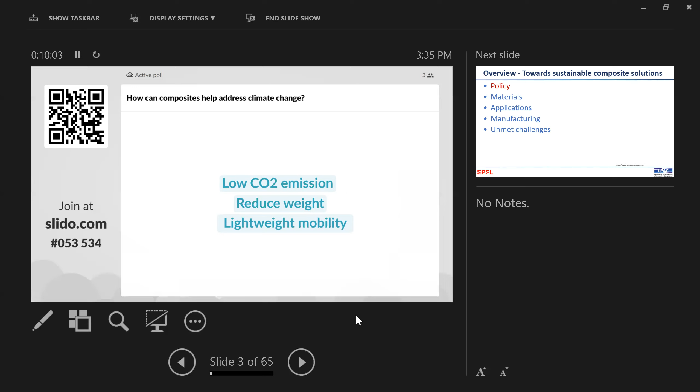So lightweight mobility. Reducing CO2 emissions. Any last ideas? Oh, here they come. Longer lifetimes, yes. Yeah, I'm going to take another photograph of this one. Great, we're going to see a few more in this lecture as we go through.

First thing I want to talk about is policy. When you leave here, there are some policies that you need to know about. One is the Green Deal. Anyone heard of the Green Deal in the EU? Two people nodding. Okay, the European Commission has set some proposals to try and reduce greenhouse gas emissions. And it set these targets. Some relate to renewable energy and some relate to transportation. So these targets are things that industry needs to work on to meet these Green Deal objectives.

So in the European Union, they can't sell these disposable stirrers for coffee anymore. Okay, things are changing and it affects companies and what they're working on. And to prepare this lecture, I spoke to 5 polymer companies, interviewed them. Solvay, Dow, Radici, a couple more, to see what they said.

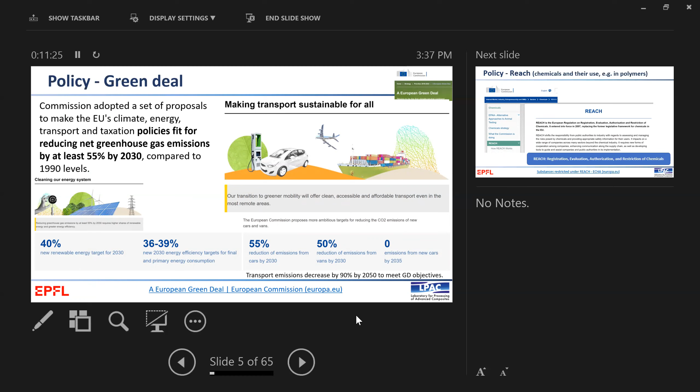One thing that you need to know about is REACH, which is the registration, evaluation, authorization, and restriction of chemicals. This is European legislation. So some composite ingredients that we used to use are now banned under REACH because the chemicals were hazardous. Okay, so it's a legal framework, and you need to know about this thing called REACH that affects substances that are often used in composite processing. So just store that word in your head. I haven't got time to go in depth into it. But you get people in companies who spend their entire career looking at REACH compliance of a company's products. Okay.

Another one is the end-of-life vehicle directive in the European Union, which basically says we need to reuse or recycle 85% of the car. So there is legislation at a European level that affects the end-of-life vehicle that we have to meet.

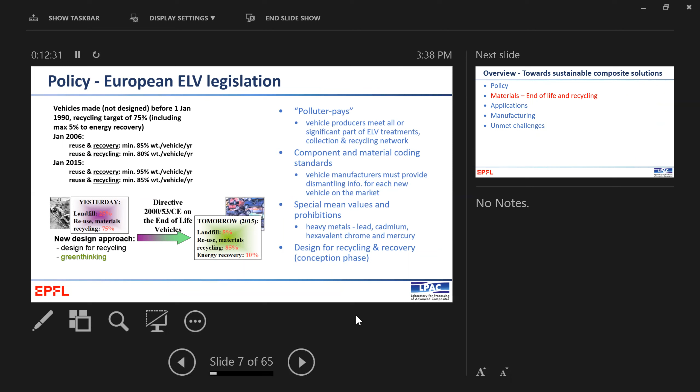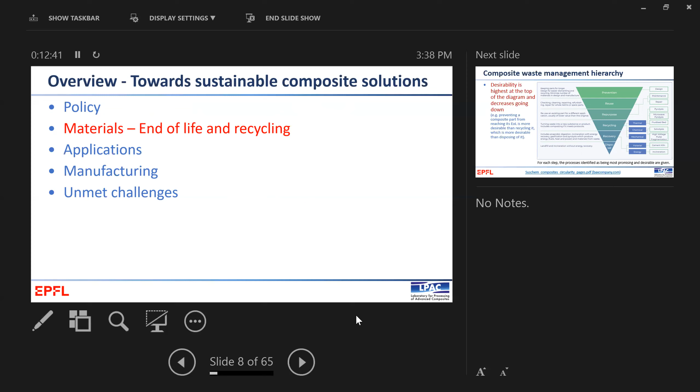Okay, so we're going to look at, first of all, materials from an end-of-life and recycling perspective, and then we'll look at bio-based materials. So from end-of-life and recycling, this is an upside-down pyramid where we want to try and prevent, reuse, repurpose, recycle, recover. Okay, so we want to keep parts for longer, design for dismantling. So that's the design part of the process. We want to reuse components, that can be maintenance and repair. We want to repurpose to keep parts going, often in a different application, kind of hard with composites.

Then you come to recycling, which is where most people think about composites in terms of life cycle analysis and the different approaches, thermal, chemical, mechanical. You can do a range of processes here to recover materials, but the desirability is highest at the top. So not just recycling, but preventing.

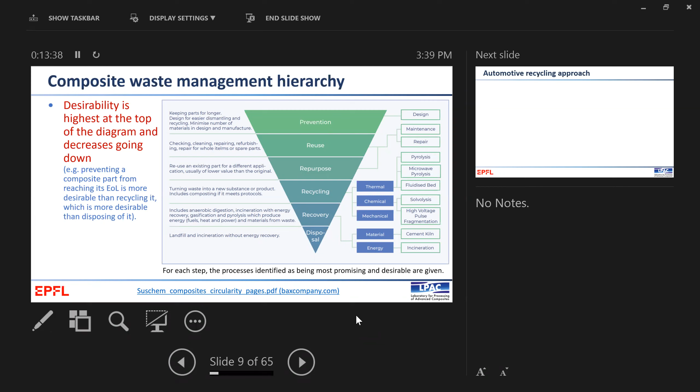The automotive recycling approach today is you take your old Peugeot and you take out the fuel and you drain the oil from the shock absorbers. You remove the catalytic converter. You dismantle some nice to have parts like bumpers, big plastic components. And then you take it to the shredder and you crush it and you turn it into small particles of material. So that gets rid of about 80% of the vehicle.

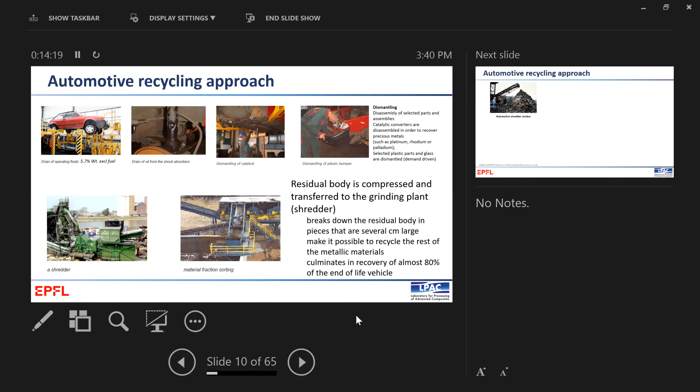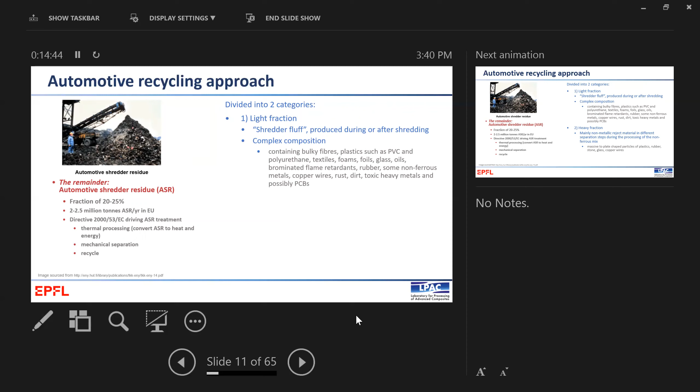So unless you've dismantled your composite part, it's going to end up like this. So in the future, we need to dismantle more components from the vehicle. What you get is called automotive shredder residue. And there's a lot of this. We haven't got time to go into this slide in lots of detail, but it's a big pile of 2.5 million tons. And there's two fractions, what they call shredder fluff, which is all this bulky plastic stuff, the seating, but it's also contaminated with hard to recycle materials. And then there's a heavier fraction.

Car companies often make statements that this will be future treated using new technologies to a greater extent, but they haven't yet got it figured out. Okay, so be aware of this and be critical.

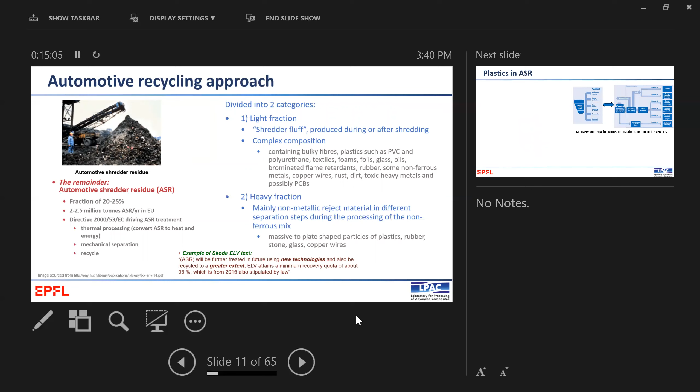Ways to recycle plastic from the end-of-life vehicle. Well, you can landfill, you can burn it to recover energy, you can use it to fire a cement kiln, you can use the feedstock in the blast furnace. Some different approaches. There are some better ones. These are the dominant polymers that are in this residue, but often it can be quite expensive to recover the materials.

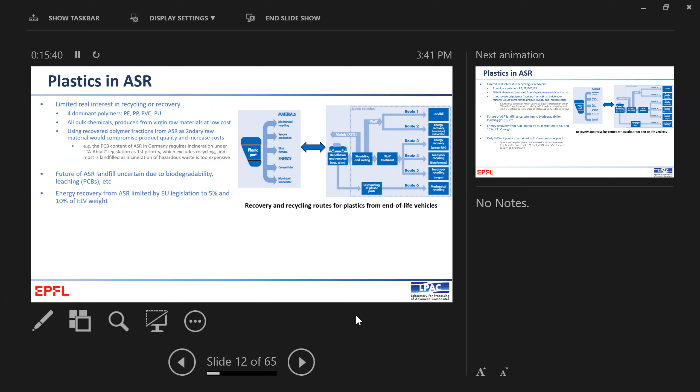Landfill is becoming illegal in the European Union, so that's going out. So only 3 to 4% of plastics in cars are currently really recycled. So there's demand for the materials. In aerospace, there is no equivalent legislation to the end-of-life vehicle. So currently you've got 2,000 aircraft parked in the desert in the US or in other places, and a lot more military aircraft. And over the next 20 years, there'll be about 5,000 airliners to be withdrawn from service.

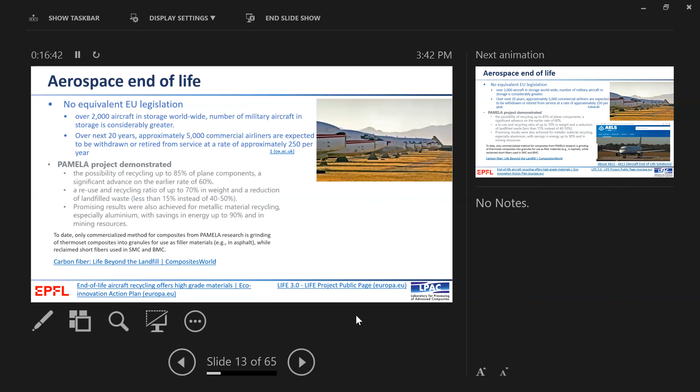Airbus had a project called PAMELA looking at recycling, but the only commercialized method from this research for composites is to grind them up for use as filler materials in roads or in sheet molding compound. So you take your old Airbus that's got a carbon fiber tail. Today, that's what happens to it. And it's not good enough. We need to go further than that with recovering materials because they are very valuable.

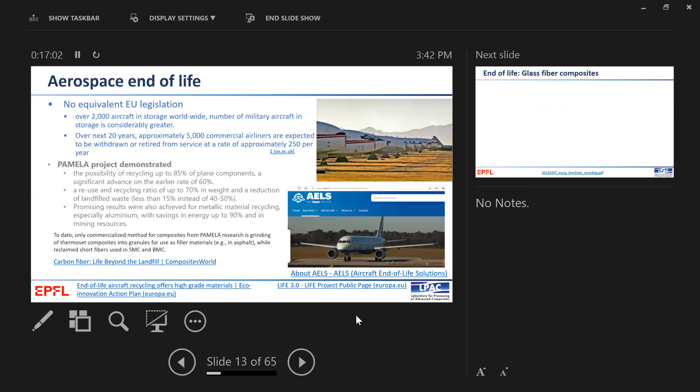There's one company in the Netherlands where they buy old aircraft, they take them to pieces, and there's actually a database online where you can rebuy parts of the aircraft, service your Airbus. So they're starting to go that way, but there's no legislation for aerospace end of life.

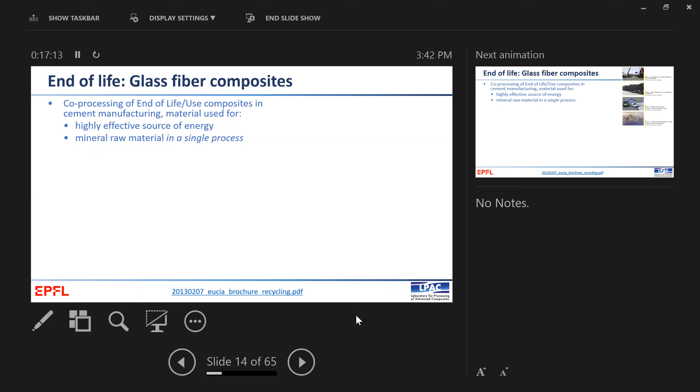I was very surprised. Glass fiber composites, well, if you look at wind energy, for example, what they do is they take the wind turbine, they chop it up into big chunks using mobile saws, like logging machinery, I suppose. Then they get this kind of regrind. And what they like to use it for is to replace hydrated or carbonated minerals in Portland cement and as a fuel for the cement furnace.

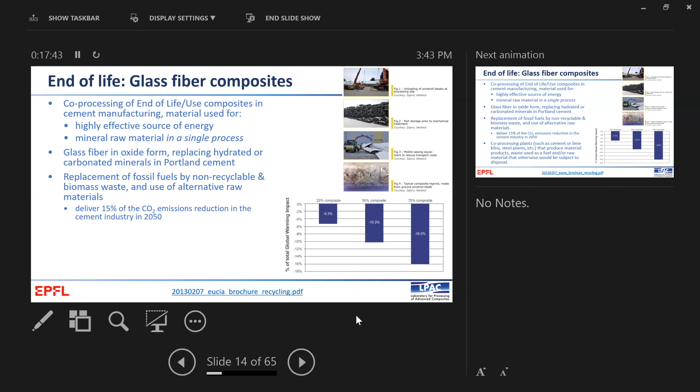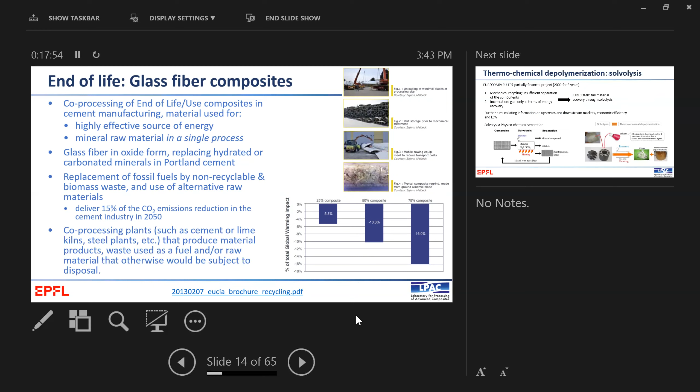And they say that that can deliver 15% of the CO2 emissions needed, depending on how much of it you put in the cement industry. So to power the furnace and to help become part of the cement itself. But again, that's not really going far enough. You're losing so much value.

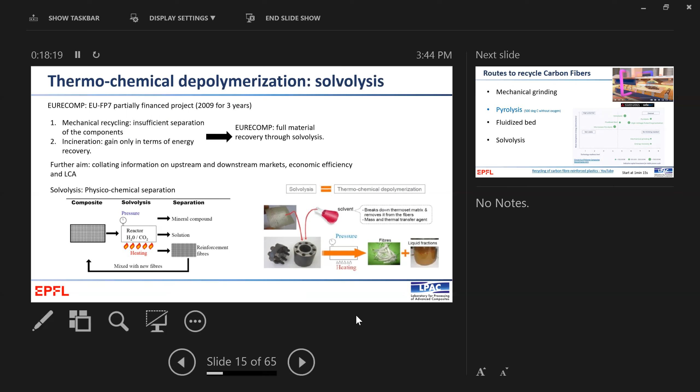We can also try and recycle by solvolysis, physical chemical separation. So you put your piece of composite with solvent, pressure and heat, and you get the fibers back. That is a way of recycling thermoset composites using solvolysis. So that's interesting. And there's a company here called Carbo NXT that were recently purchased. And they are here in terms of technology readiness level, TRL 8, and very attractive.

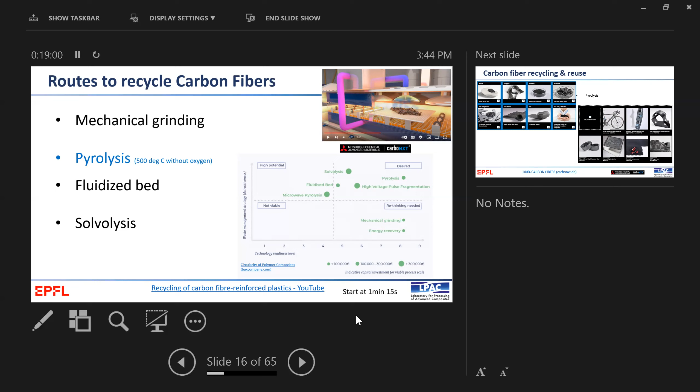So they now take old bicycle frames and bits of carbon mats and they put it on a conveyor belt and it goes into an oven without oxygen and they can get the carbon fiber back, okay? But it's all manual. You see in the video, people cutting out these things with scissors and hacksaws and putting it on a conveyor belt. So it's not as automated as those other factories that you saw at Airbus or BMW. So you run the risk actually that it costs more than the virgin material.

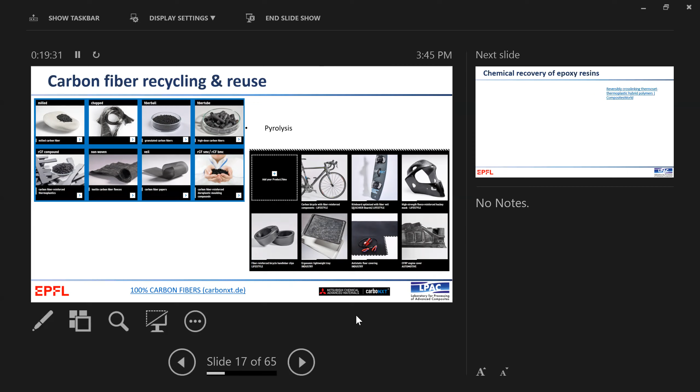But nevertheless, this company has converted waste into a variety of material feedstocks, either random fiber or chopped. They can't make aligned fiber. You can't get back from woven product to a UD material, very difficult. But their customers have made a whole range of products from recovered carbon fiber. So that is possible, okay? That is commercial.

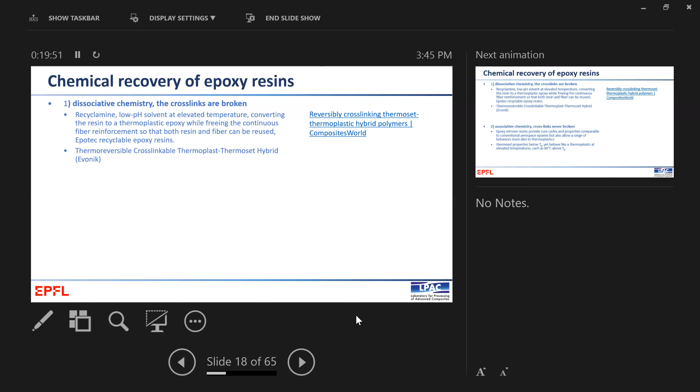Chemical recovery of epoxy resins. There are two methods coming out. First is using dissociative chemistry, where we convert the resin into a thermoplastic epoxy. Evonik have a system now that's commercially available. So they actually break the cross-links. The second is associative chemistry.

And this is a really tricky material because below the Tg, it's a thermoset, and above the Tg, it's a thermoplastic. It's a vitrimer, epoxy vitrimer resin. So you can do wacky things. So you can heat it up above the Tg and stamp form it, and then you can stick this and dissolve off the resin. So epoxy resins are really changing. People are reinventing them. Okay, I found that really quite fascinating. Using this thermoforming and solvolysis, you can get back to your carbon structure.

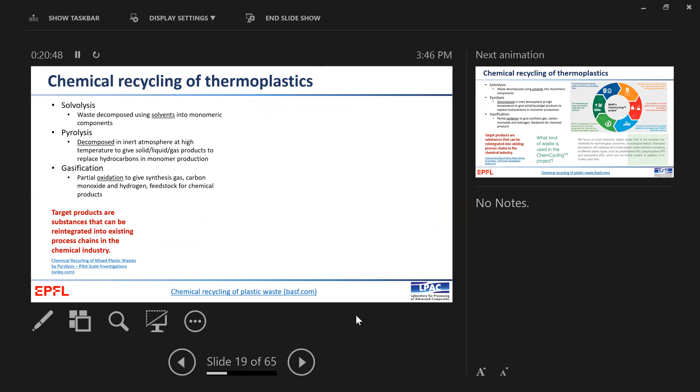Recycling thermoplastics is also possible using solvolysis, pyrolysis, or gasification. And this is like molecular recycling, as one of my industrial colleagues likes to call it, rather than chemical recycling. So you basically break down the polymer into the building block to polymerize a new polymer.

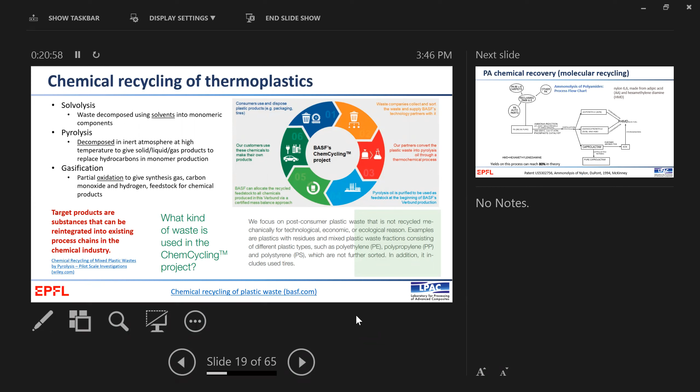You're recreating the feedstock. And an example for polyamide is you take your waste carpet, your automotive parts, and you use here an ammonia reaction with the phosphate catalyst, and you get back to your adiponitrile, which is the building block of hexamethylene diamine, which is what you make polyamide 6,6 from. So you're not mechanically recycling, you're actually breaking it down into the molecular building block needed to remake a polymer.

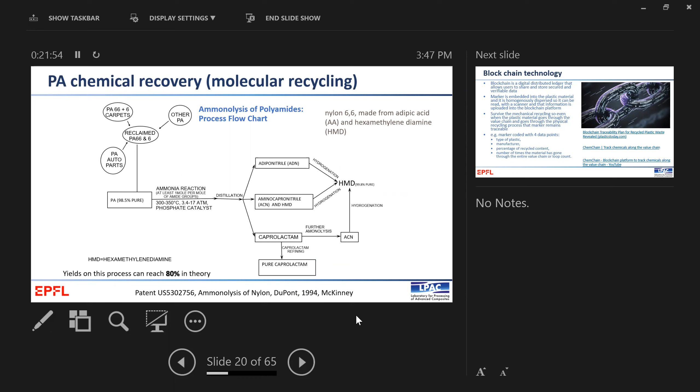And when I spoke to the person responsible for sustainability at Dow, he was saying this is the way to go. He was saying bio-based plastics, they don't like to talk about because of the conflict with water and agriculture and food. But here, there's a lot of waste plastic around that can be recovered and broken back down with really quite high yields. And if you run the chemical plant with renewable energy, the life cycle analysis is interesting.

Something else which I just put in at the last minute that you'll hear about is blockchain technology. And it's basically a way to put a marker in the plastic material so that you can know what it is all the way through the value chain. So when it comes to reusing or end of life, you can know what kind of plastic it is, which company polymerized it, how many times it's been recycled. So it can pass through the recycling step.

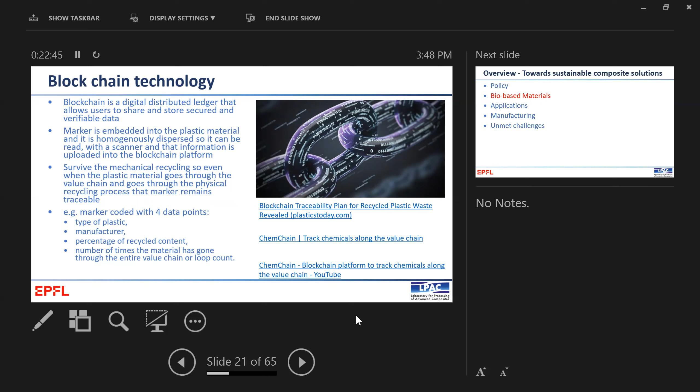So it's a way of using secure cloud data to be able to track your polymer through the stages of its life to help recycling. I hadn't heard of this word until 6 months ago. It's new to me, but a lot of people are talking about it. Dow and Solvay are both using this experimentally.

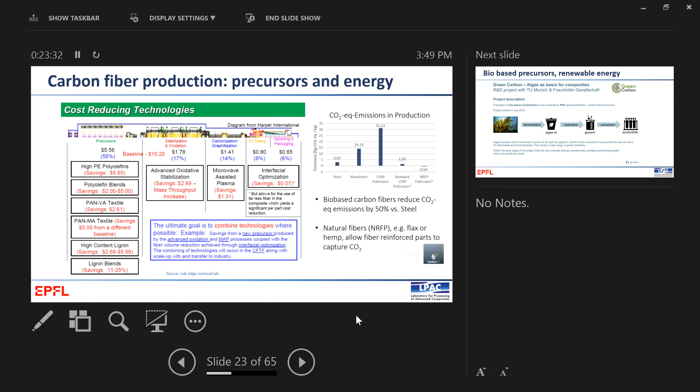And that's really interesting to me, because you could imagine that being scaled. It's not really competing with food. The problem is we need that in place. So if you want to make hydrogen storage tanks, you need to have enough kiloton capacity in the supply base to make your tank. And this is like 20 years behind where we need it in society. But nevertheless, that's the kind of thing that's going on.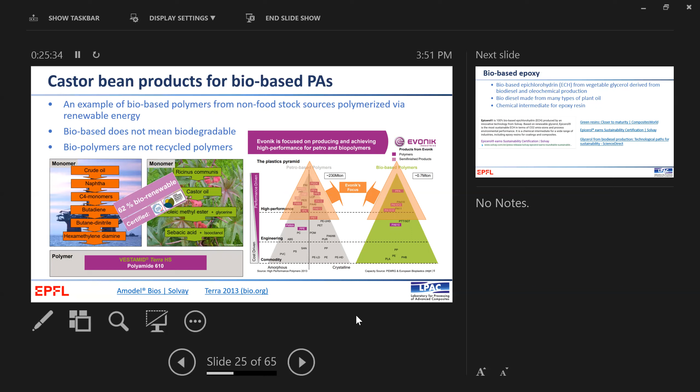Natural fibers, also very interesting. This is an EPFL spin-off, Bcomp. And they use European flax that they can weave, and then they can impregnate with thermoplastics. So you can see their value proposition. It's very good in safety, and they have some very interesting projects.

Here I've got a nasty footnote. I don't know if this applies to them or not, but someone did a life cycle analysis on flax. And if you use fertilizers to grow your flax, phosphorus and nitrogen cycle, the environmental impact is really hit. If it's grown without those fertilizers, it's really better. So you have to scratch the surface and see what's below the paint, okay?

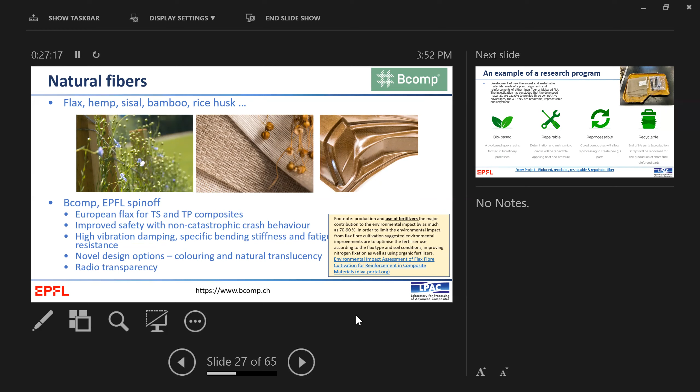If Bcomp are sourcing their flax that hasn't had high levels of fertilizer, it's really good. But if you're using lots of fertilizer, you're affecting that planetary boundary on the nitrogen and the phosphorus flows, okay? So you always have to think a little bit deeper to the global picture, not just, oh, it's a plant, because the plant didn't just grow in the field without some fertilizer, but maybe it did, I don't know. Question I need to ask them.

Okay, 12 years research in Veronique's lab has led to the startup, and it reduces maintenance costs and extends the lifetime of composites. A very circular approach.

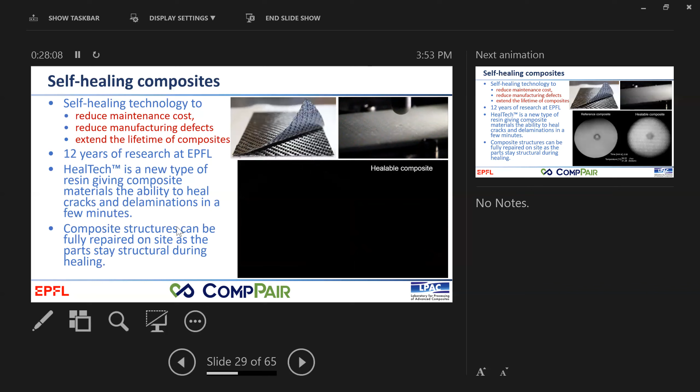Okay, I'm going fast because we're running out of time.

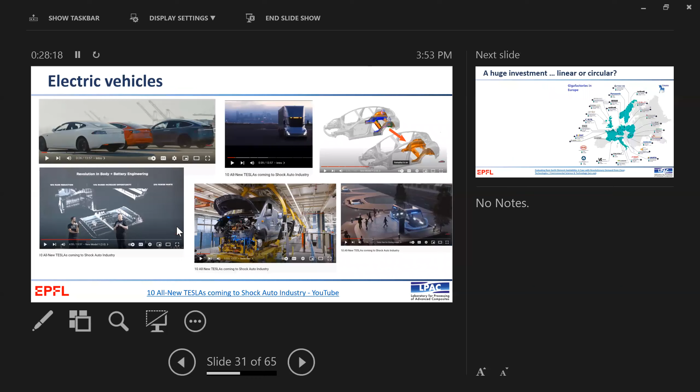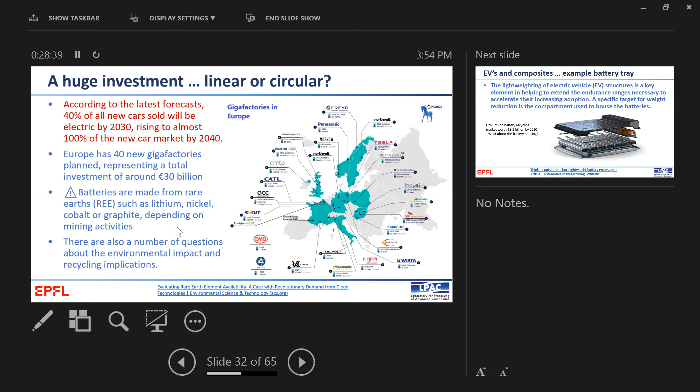Applications, electric vehicles, a huge investment. This is investment in battery factories, in gigafactories. And we need to make sure that we have answered questions about the environmental impacts and the recycling of these rare earth metals and lithium, because you're all material scientists. So ask about these things. I'm going to have to go quick.

Composites have a role to play in battery housings for vehicles, because you need to make these battery housings lightweight, and that's a key to their range and their increased adoption. So lots of people are looking at the battery case for electric vehicles. You can read about it here.

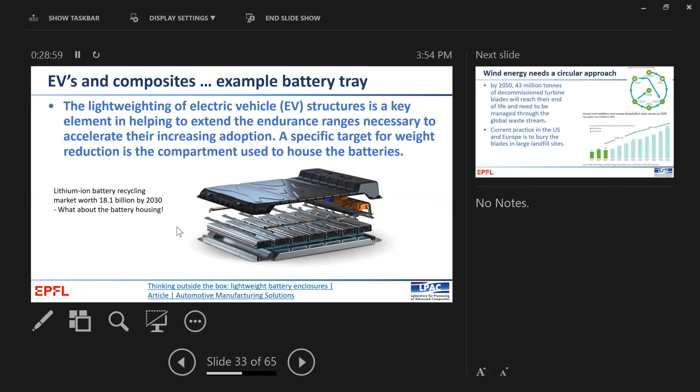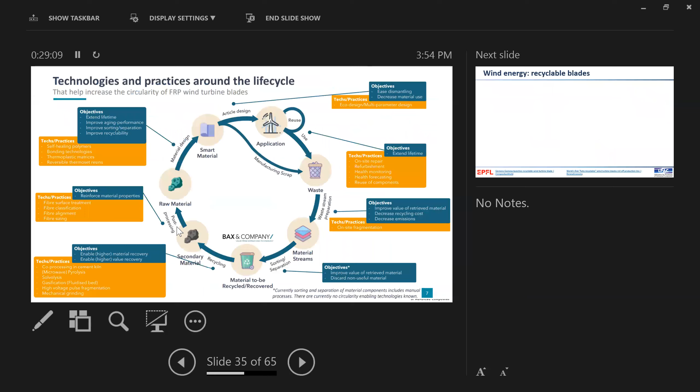Wind energy needs to become more circular. It's growing, like we said. There's a company, Siemens, that's now using a new resin, which is recyclable via solvolysis. So you can chop up your wind turbine blade, and rather than grinding it and putting it in the road, you can use solvolysis to separate the resin from the fiber and the glass, plastics and wood.

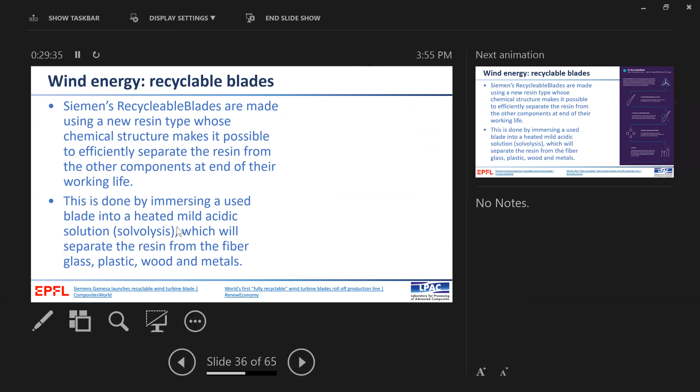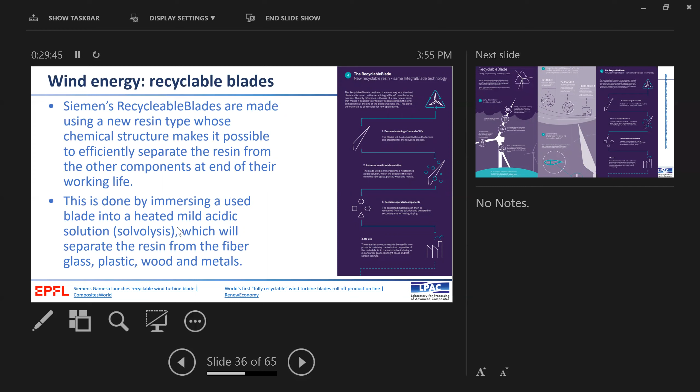Yeah, so you can really get back the materials with a higher value. Okay, if you're just grinding up the waste, it's got almost no value. Here you've retained value. This is a circular approach. So wind energy, chopping up, solvolysis, and that's very interesting and a way to think.

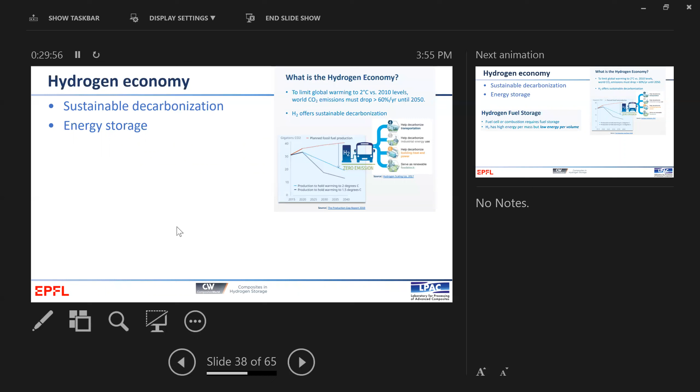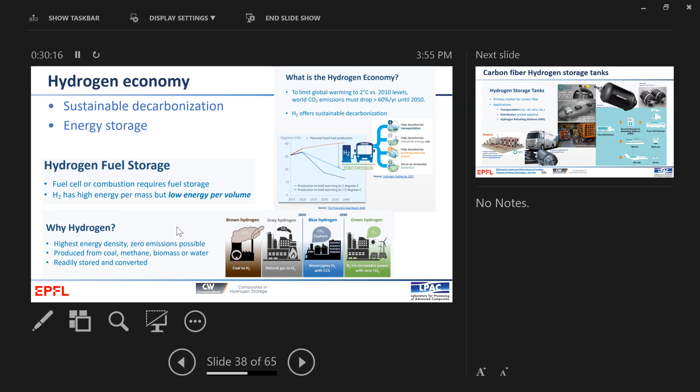Another important application is the hydrogen economy. And the idea there is that we can use hydrogen as a fuel source. It's got a high energy per mass, but low energy per volume. So hydrogen does give a very high energy density, and the hydrogen economy is a key towards moving this curve down, especially when you're not using dirty fuel to create the hydrogen, but you're starting to use renewable power.

And the hydrogen economy needs tanks to store the hydrogen in. So you can look at vehicles, refueling stations, boats, aircraft, trains, longer range vehicles, so not for in town, but for driving long distances. And they all need composite tanks to store the hydrogen in. So how can we make composite tanks circular in their design philosophy? Those of you who are doing the project will be aware of this.

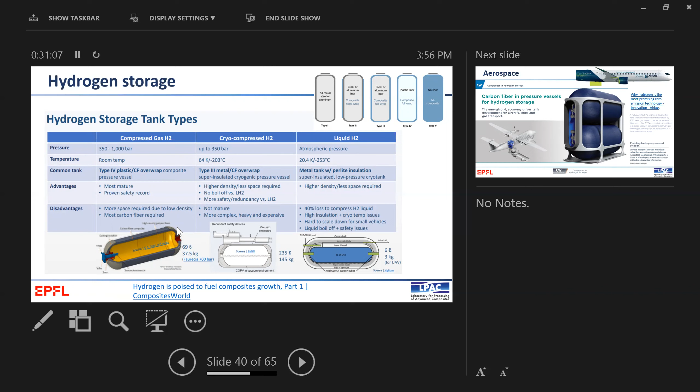There are different classes of composite tank, and they use carbon overwrap in compressed gas and cryo-compressed tanks. So we're going to need a lot of carbon fiber to help support the hydrogen economy. It's going to be a huge market area and a lot of work on pressure vessels.

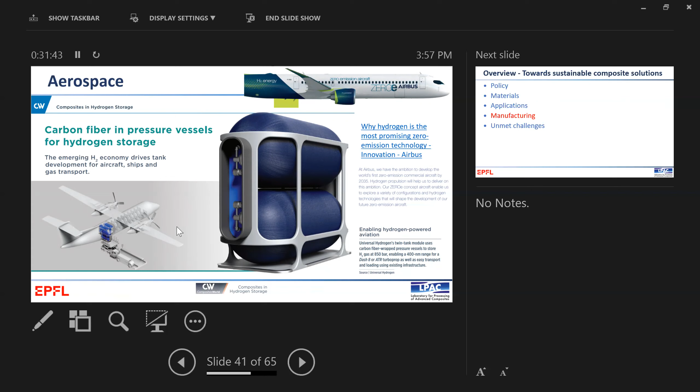Airbus also have their ZEROe concept. They want to have a zero-emission commercial aircraft by 2035. So they're going to fly aircraft around with giant hydrogen tanks rather than burning conventional fuel. Here you can see a concept already for a 400-mile range Dash 8 turboprop aircraft where they slide in these tanks. You may say, well, hydrogen is highly explosive. Well, so is aircraft fuel. Who knows? That's just a trend, okay?

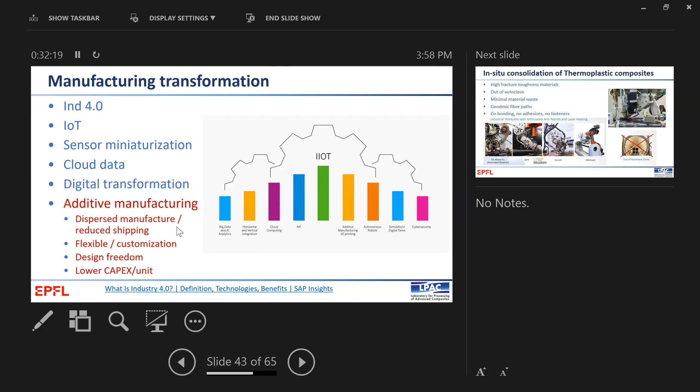Manufacturing. We talked about this diagram previously, and additive manufacturing is part of this. And I'm going to give you a super high-speed tour until the next lecturer comes in around additive manufacturing. The idea is that you can manufacture your product in different locations. Rather than having one massive factory, you can have dispersed factories. It reduces shipping. It's flexible and highly customizable with lots of design freedom, and the investment in a machine is much lower.

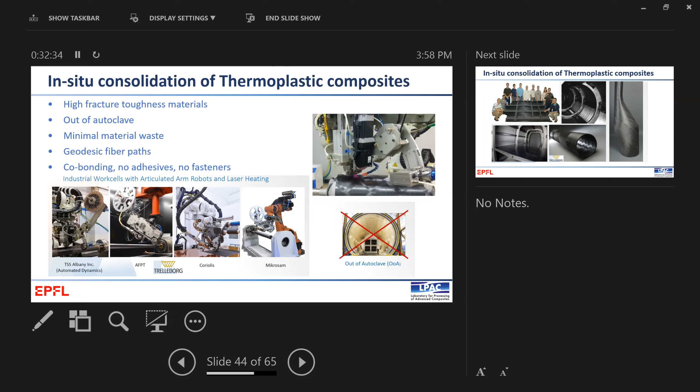Composite materials have been following additive concepts for a long time. You can see here thermoplastic tow placement. There are 4 companies doing this, where you take a tape and you heat and press. And now we start to see more and more of this going on. This is all an additive manufacturing kind of approach of thermoplastic composites.

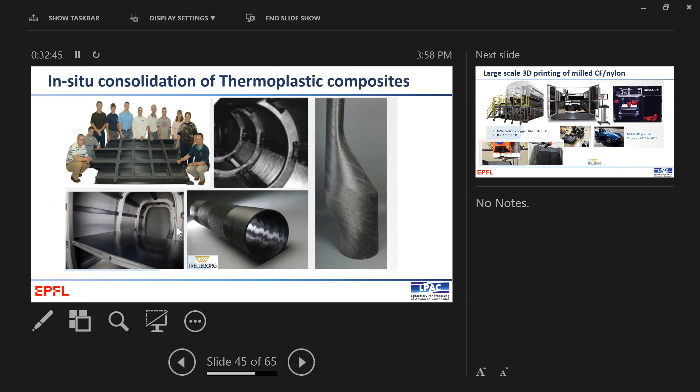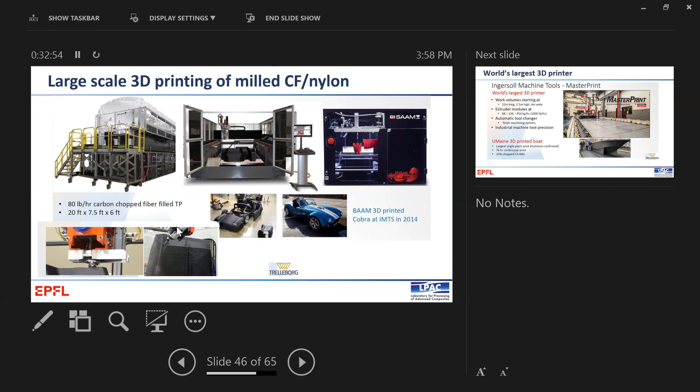This is just chopped carbon fiber, but there are now large printers available that can print huge components. Really large boat hulls can even be 3D printed from different combinations of chopped carbon and thermoplastics.

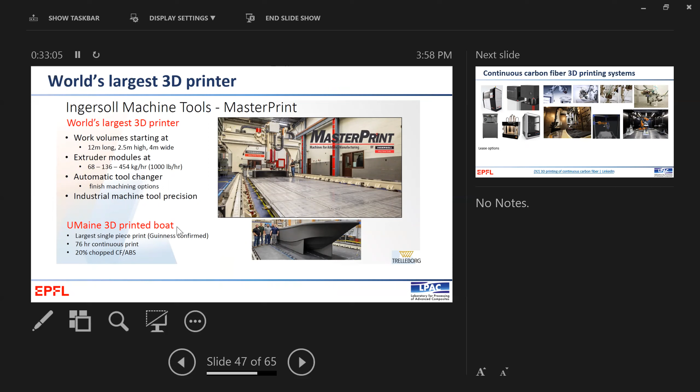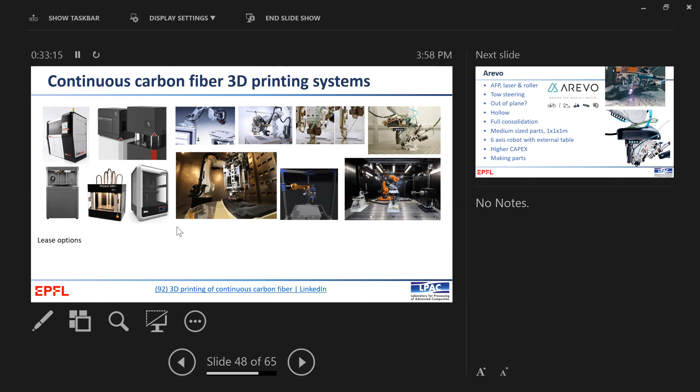When we go on to look at continuous carbon fiber 3D printing, there are machines available which go from kind of desktop systems all the way up to advanced robotic systems. And I'm just going to quickly go through these as a quick tour. A company called Arevo that can place bicycle frame type components by heating up tape and applying pressure with a consolidation roller. And it's basically automated fiber placement, but renamed as 3D printing.

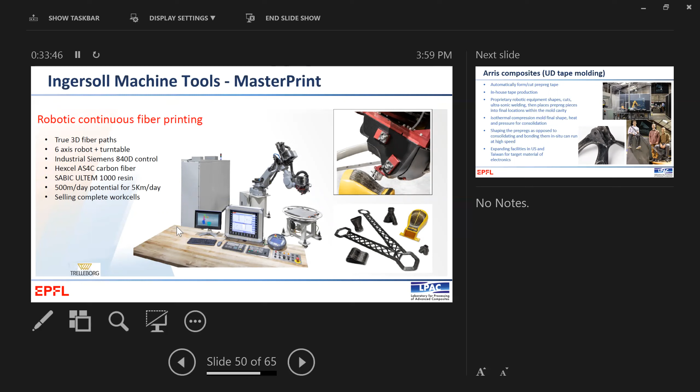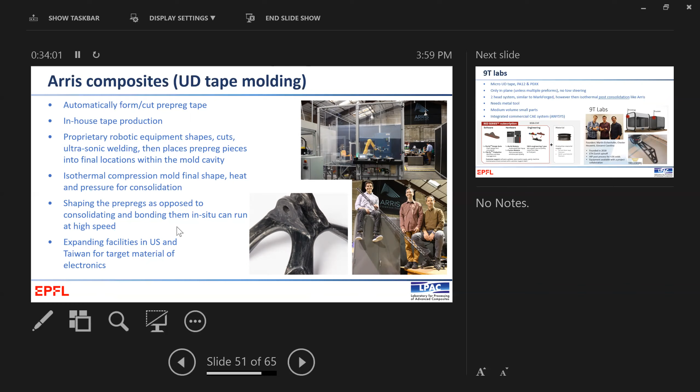Other companies 3D printing composite materials using a very simple industrial 6-axis robot. Another one, Arris Composites, where they basically use a robot to take pieces of tape, they ultrasonically weld the tape together into a preform, and they put that into a mold and press form it, and they can make really wacky structures that you couldn't make by any other method.

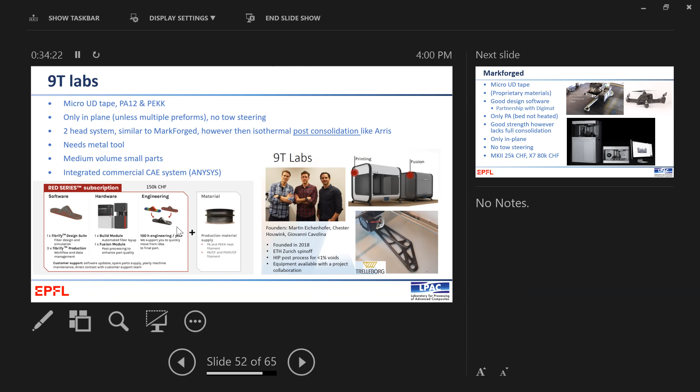9T Labs, a Swiss company, they're placing strands of carbon fiber using a 3D printer, and then they put that into a second module and they heat it up and press it. So you can make a really complex kind of component by printing the fibers first and then heating it up. Markforged's process, we have that one at EPFL, and here are some parts where this has continuous carbon fiber inside, printed on a printer.

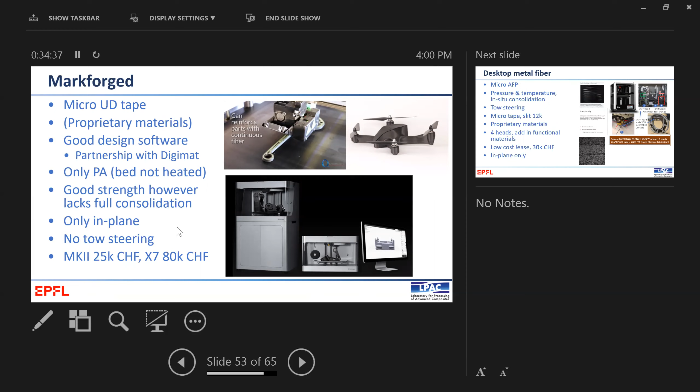Another process, Desktop Metal, they can take a tape like this, carbon fiber tape, and they can print that, apply pressure with a micro AFP head. So like the big process you saw at Boeing and Airbus, but with a tiny roller, and you can then print a component like this, which has got continuous carbon fiber inside, and it's overprinted in short carbon fiber. Which, if it wasn't for COVID, I'd pass it around.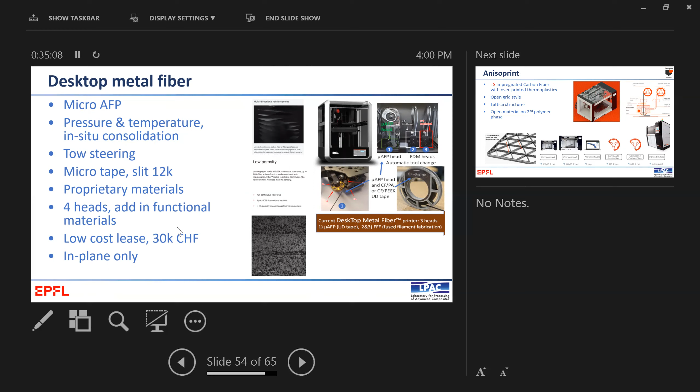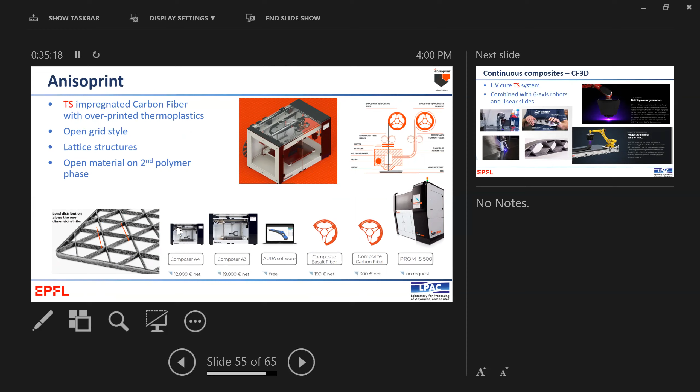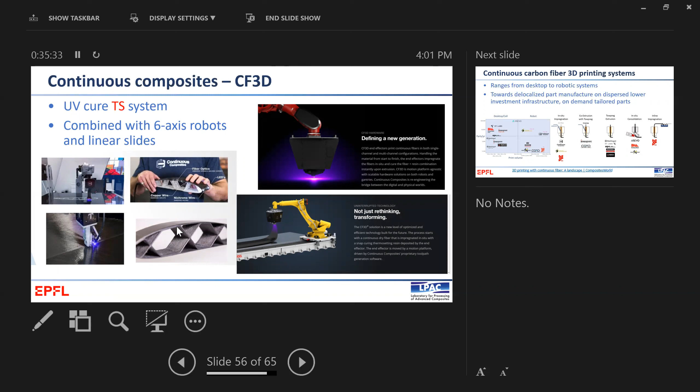So that's what you can see kind of coming out. Another company, Anisoprint, which is the thermoset process. That's got carbon fiber printed inside it. So we're starting to see composites moved in this direction. A thermoset system using UV cure of resins, and they can print some really interesting structures. Okay, we're not going to have time to go through all these things.

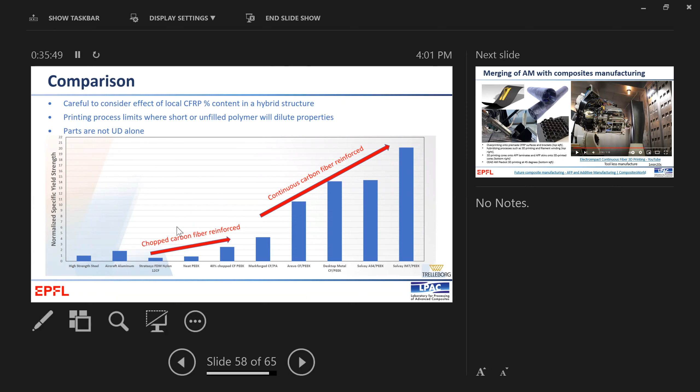Looking at some properties, some normalized specific yield strength, we can get some amazing properties with these 3D printed materials because they're highly directional. You can put the fibers really where you need them. That's the interesting part. And I'm going to play this video because it's kind of cool.

This shows the combination of toolless 3D printing, where they print the mandrel and then they print onto the mandrel. So they start from nothing, turn on the lights, very dramatic. Okay, it's a robot, nothing here, and they print their own tool and make the composite parts, all from additive manufacturing. So that's the continuous carbon fiber, and this is the plain polymer, this is the tape. So they're now 3D printing their own mandrel.

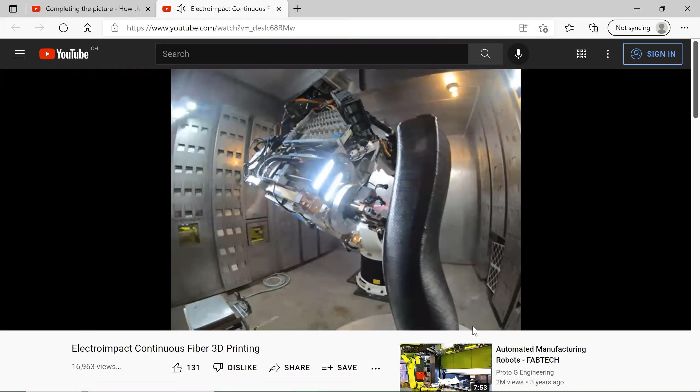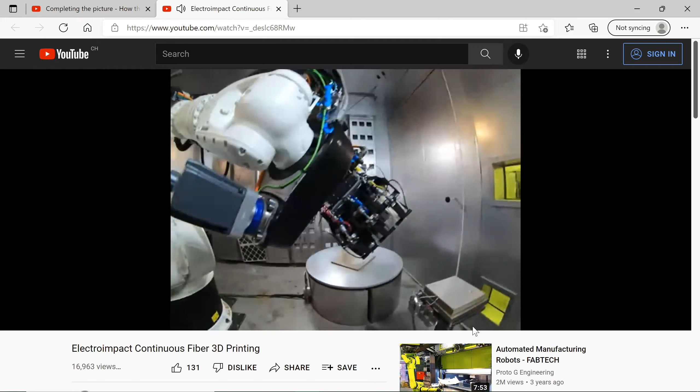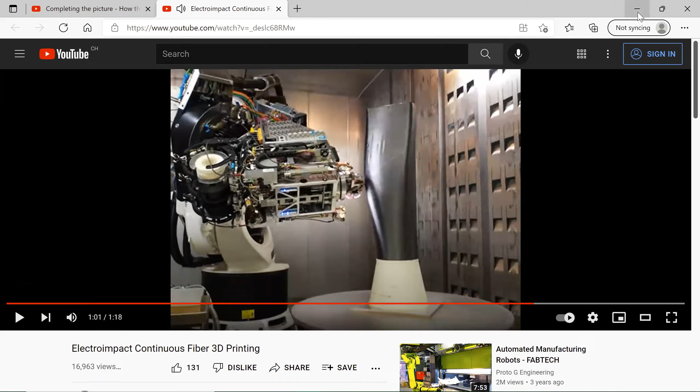Switch to the plastic placement. So you get the idea. Very cool process. So that's all been done without a molding tool. You can have that robot in different locations and make the same part without having to have a big factory. Okay.

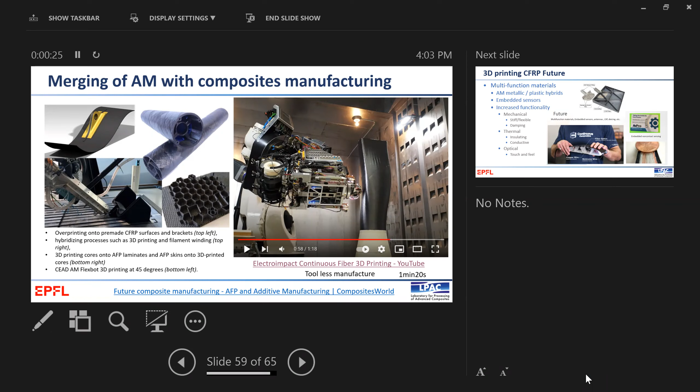And you can start to see here, people are overprinting honeycombs onto a laminate, and they're combining filament winding with printing their own mandrel system and the attachment points to go inside the tube. So it's starting to revolutionize composite manufacturing. That's what I would like to say.

People are starting to mix metals and composites. They're starting to embed conductive fibers inside the composites. So you're looking at multi-material systems, stiff and flexible, damping, conductive. So your design freedom is going up and up and up if you can start to put conductors in your composite as it's printed.

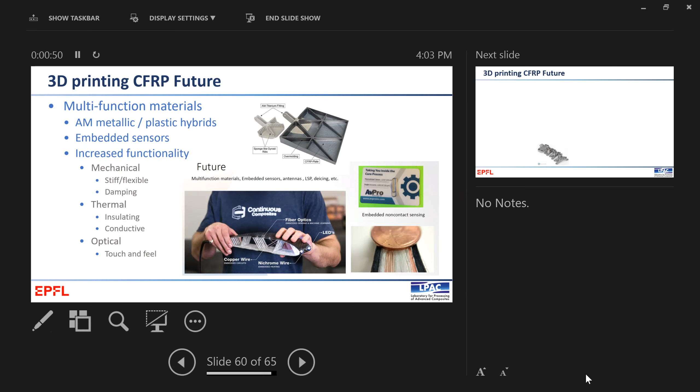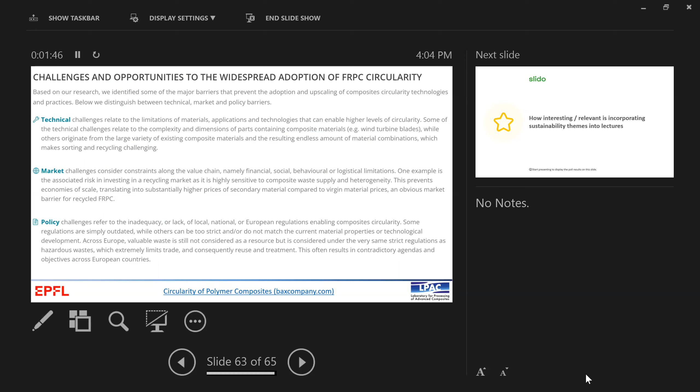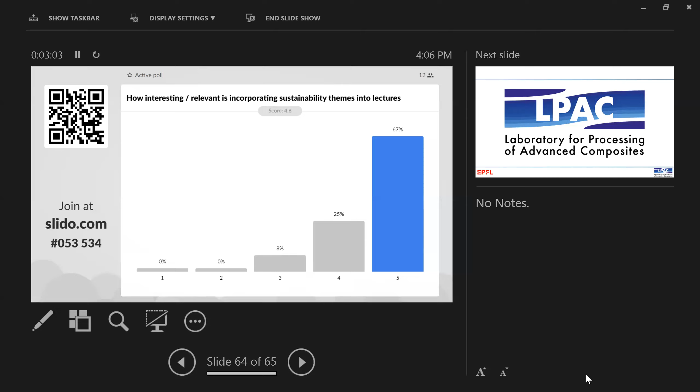So, one last Slido. How interesting or relevant do you think is incorporating sustainability themes into lectures? So 5 is good and 1 is bad. Okay, so 12 of you have responded. It's a small statistical sample, but if you have any suggestions afterwards, feel free to come and talk to me how it can be improved next year. You know, it's the first time, so it can always be done better.